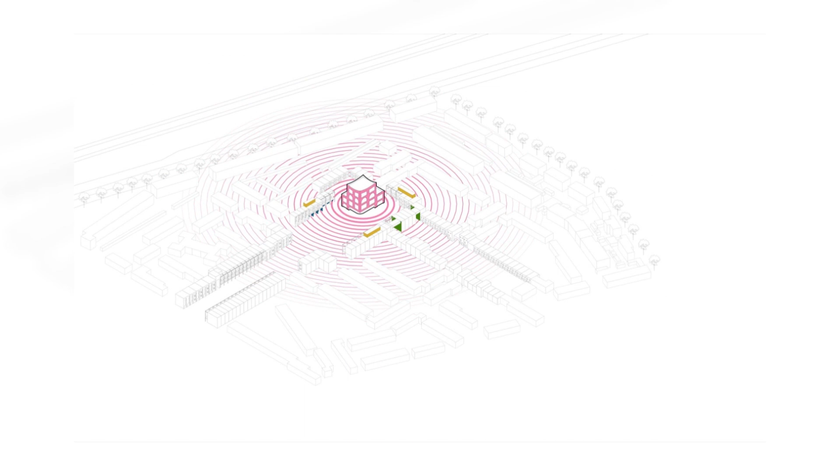Precedence was given to a community-based approach. This would be combined with the renovation of the houses and expansion of the range of facilities in the neighborhood, such as building a neighborhood school and encouraging small business owners so that Edisonstraat would once again become a lively and attractive street. Investing in the local residents requires a high commitment of people and resources.

Therefore, those who wanted to help in developing the neighborhood activities were given priority when allocating the social housing units developed by Trudo. All interventions in the spatial structure of the neighborhood had to offer something to the current residents. The primary goal was to invest in the future of the residents.

This is in contrast to neighborhood revitalization projects in other neighborhoods in the Netherlands, where development has often led to the displacement of residents.

Unique approach. A unique approach was adopted for redeveloping the Woensel-West area. There was no master plan or end result that had to be worked towards step by step. A flexible approach was chosen, where adjustments could be made continuously and the result was not fixed from the start.

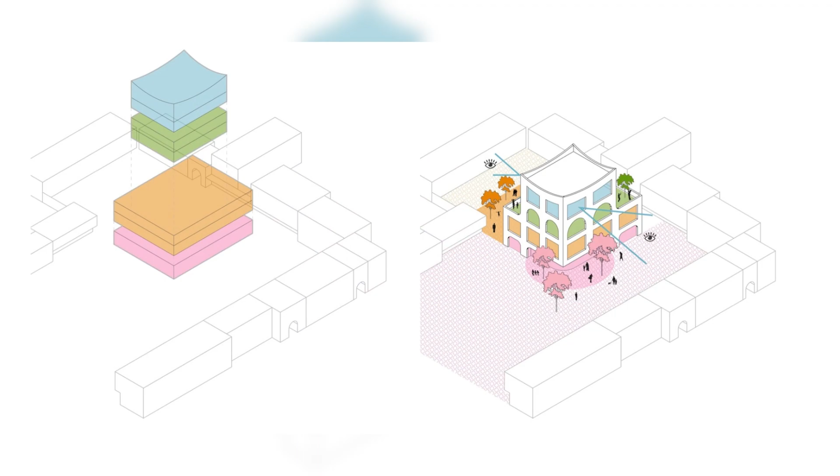A spatial planning vision characterized as, because tastes differ, resulted in a structure that allowed ample room for the development of differences and diversity, which thus reflected the diversity of the residents of the neighborhood. This also included a wealth of shapes and colors more commonly seen in Mediterranean or even Caribbean regions.

In terms of the architecture, this had a liberating effect. The room for adaptation and interim evaluation has ensured a gradual transformation of the neighborhood, where Woensel-West residents and users of the facilities have been closely involved in every step of the process.

Layered. In terms of urban design, what was envisioned was an iconic neighborhood building that is freestanding and omnidirectional, i.e., with no clear facade orientation. As a historical reference, the inspiration was a weighing house.

In reality, a 7-story building is a bit too large and imposing for the site. However, a very beautiful sculptural form was created by housing the space for neighborhood activities on the square in a glass building base, and by placing a green roof garden on the other side.

Waag Woensel-West stands out with its design, colors, and materials. In this sense, it fully reflects the diversity of the neighborhood, where half the residents have an immigrant background.

The extra-large windows extending over 2 floors make the large building look smaller. At the same time, the steel-framed windows reflect the features of the different layers, where the windows have a unique design every 2 floors. The ground floor houses the space for community activities, which is an inviting meeting place for the entire neighborhood.

All local residents can come here with their questions, to participate in development activities, or simply to enjoy each other's company. The duplex apartments are also located on the ground floor.

Above them are the corner apartments overlooking the square. The roof terrace on the building's base offers a shared outdoor living space and, at the top of the tower, there are apartments with views of Eindhoven.

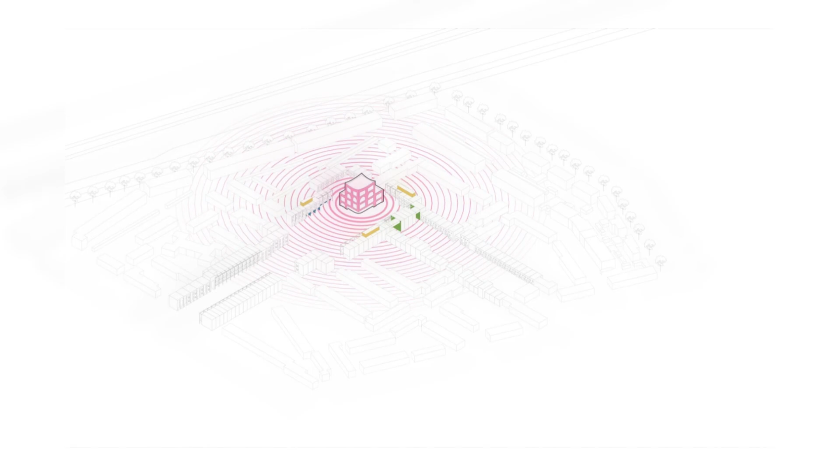The facade is made of eco-shapes, a cladding material specially developed as a sustainable alternative to traditional stone facades or stucco. It gives Waag Woensel-West a linear relief, an added accent that makes the building look even more distinctive.